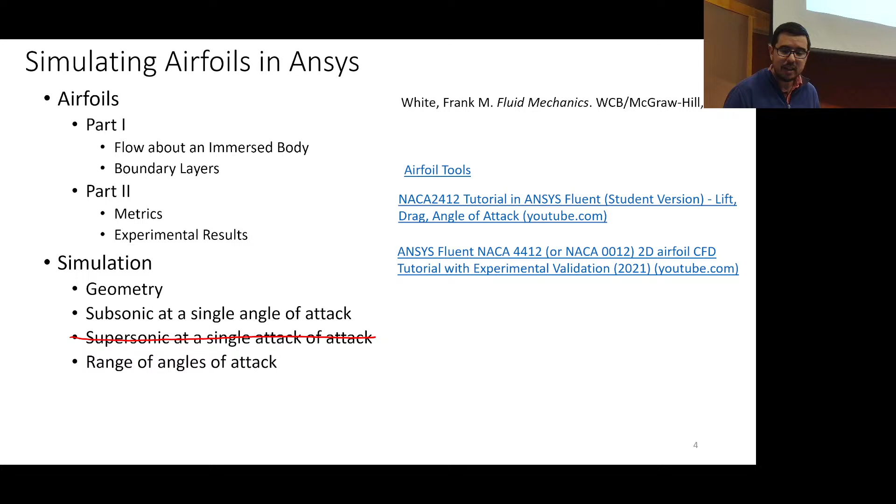We're really focusing on subsonic today, and we're not going to do supersonic. Okay, so that is not. Let me just. Yeah, we're not focusing on that, okay, but we will talk about a range of angles of attack.

So when we have an airfoil, we have flow about it, and what have you already simulated that has something with flow about it? We've simulated a wire, right? We've simulated cylinders, or spheres, better. Well, the wire was like a cylinder, but then we simulated spheres in the last homework, in the last session.

How are these types of simulations similar or dissimilar to each other? Like, what are the similarities? What are the differences?

If I'm thinking about an airfoil, you don't even have to think so much about the simulation, but just think in terms of the real world. How are these simulations, how are these physical experiments similar or different from each other?

Yes? Well, they're going to be different geometries, but you're going to be using the same. In the spherical one, you just use the axisymmetric condition. Yes. In something that you need a 3D object, you'll just extrude it. Okay. In the cylinder case, you just extruded it. Okay. Whereas in the sphere, you use the axisymmetric, but basically Ansys is going to do the same thing, like taking the surface integral and applying forces.

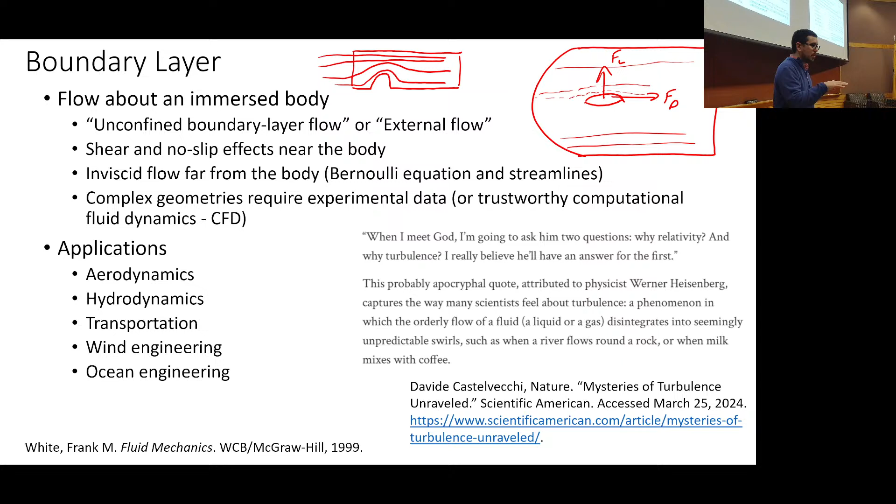Some of you want to do supersonic modeling for your final project. That's okay, except I suggest that you stick to very simple geometries like a wedge, because one, we're not going to cover supersonic flight in examples that we do, and two, they're much more complicated and you have shock waves and those effects.

Okay, so another interesting thing that happens with foils is separation. And this is not like you're separating from your family or anything like that. This is separation in the flow. You're taking some fluid mechanics now, right? I asked the other class, have you got to the boundary layer problems yet? No. Blasius? No. Boundary layer? Okay. So here's a little fluid mechanics for you.

This is a lot of fluid mechanics today, right? I put a flat plate, like you see here. A lot of times they put a little knife edge or something there, but it's just a flat plate. And I start running air over it. That plate can have some drag on it, right? Even though it might have a very small front cross-sectional area, it has length, and there can be shear along here that exhibits some drag.

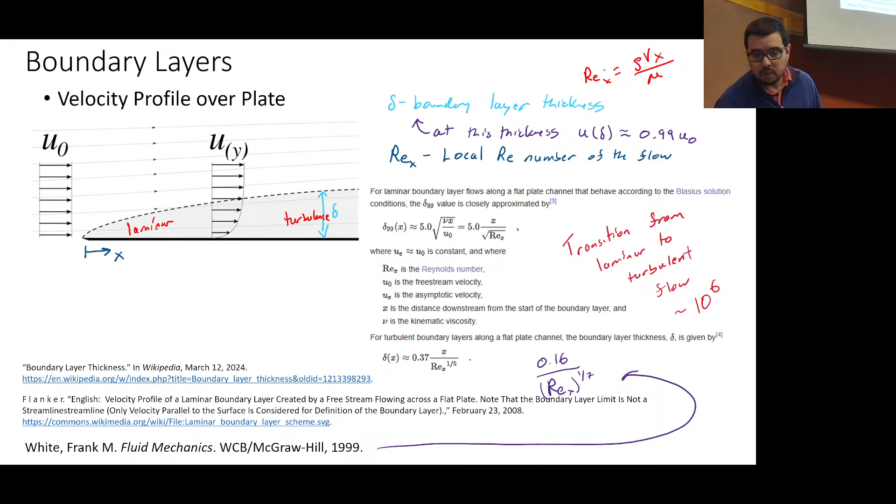Now, you can watch different YouTube videos or read different papers and the d'Alembert paradox about why things really fly. The rough approximation we're going to go by here is, what does everyone usually say? What is the one sentence version of why airfoils generate lift? Yes. Is it because there's a higher pressure below the foil than above it, so it pushes it up? Yes, and can you add a conjunction like because? Why is that? Because of the design of it? That's too vague. Go to the physics a little bit.

So you're right. Airfoils generate lift because there is high pressure below the airfoil and lower pressure above the airfoil. That's true. So let's make it one sentence. We could say the lift force due to high pressure below and low pressure above occurs because... come on, yes. The speed of the air is different on the top and the bottom. Yes, and low pressure is associated with... High velocity. Yes, yes. We're mechanical and aerospace engineers. Okay.

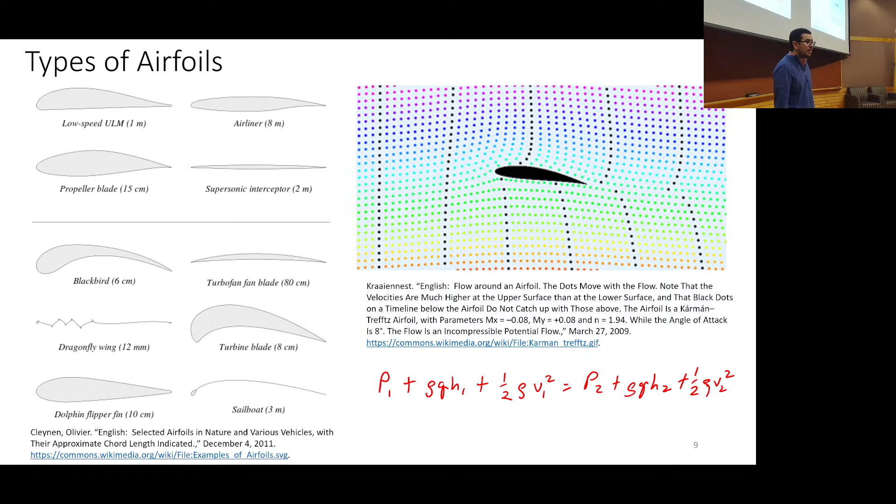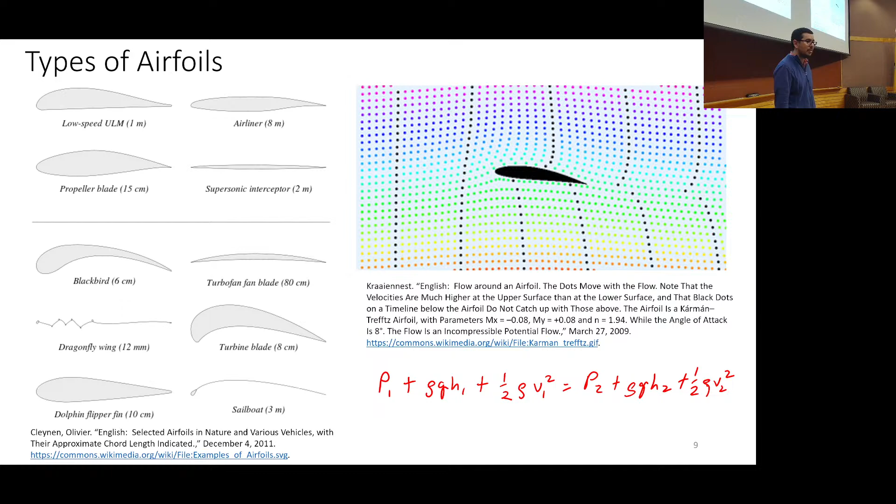Yes? One of my classmates says that it's because the air is going faster over the top of the foil than on the bottom. Is that what it is? The air is, in fact, going faster on top of the airfoil, which means there's low pressure on top of the airfoil. It's not the other way around. It is not the other way around, okay?

And so we have this beautiful little demonstration. And someone asked, how did they do this simulation? I'm not exactly sure what they did, but let's just follow the profile, okay? Dot, dot, dot, dot. And what happens? It disrupts the top flow. Right, and how is the flow above? If this were a car race, and these are all the little cars, who's winning? The air on the top is winning.

And sometimes they say, oh, it's because of that camber on top, the air has to travel a greater distance in the same amount of time. So therefore, the local velocity has to be higher than the velocity that's just below the airfoil. Okay?

So, yes, go ahead. Maybe I'm just being too picky, but is there not more friction on the top because... I don't know. Well, so yeah, there's a larger area, and yes, you could say so. This is the first order. When I say first order, this is like the kind of elementary reason, right? But fluid mechanicians, a lot of people say there are paradoxes. There are all kinds of things, like you just Google YouTube videos, look at Veritasium, they'll say this is why the foil really works, all right? It's really this, it's really, yeah, okay.

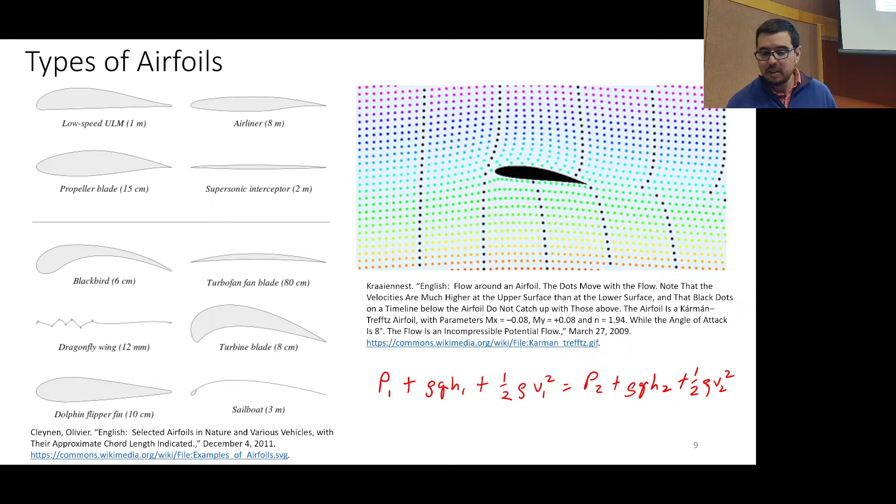Okay? So these are all things that you can play with, and people have played with in their designs and with their wind tunnels. Even the Wright brothers, they made a wind tunnel, and they were testing things out. So, let's talk about some of the metrics. And these are both geometric quantities and also the coefficient of lift, the drag, and the parameters that we measure when we're doing the experiments, the forces.

Okay. So again, I'm not going into like the 20% this, the 40% that, because we're going to be studying it in 2412. But the basic thing is that, as people said, we need a chord length, which is how long the airfoil is, and we need a span. That's how wide the airfoil is.

And in 2D, which is what we do our simulations for in this lab, we're only using 2 dimensions, we essentially just say that the span is 1 meter. And that's a pretty good assumption. A lot of the 2D, like you're like, how do I get this 3D number? I've got to get a force out of it. It gives me force, but in order to have a force, I've got to have a depth. So usually the simulation software says 1 meter is what you're going to use.

The area, this confuses me, and you're very smart, so you won't get confused too much. I often think, because my PhD was in spheres and in liquid bubbles, right? So I'm just like, I need the cross-sectional area, and that's kind of this frontal area that's hitting the liquid, and that's going to be my area that I'm caring about. Because I have this. Do I have it here? Yeah.

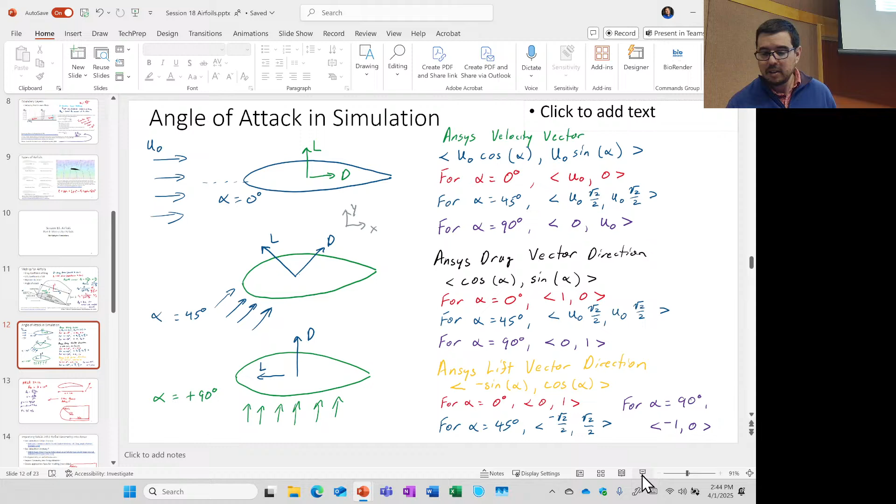Now, I gave away my answer. Okay, you didn't see that. Okay, and you didn't see that either. Okay, so

Alpha here, what is alpha? Some of you said it already. Angle of attack, right? So then that top one is angle of attack equals 0. What do we see? When we calculate lift and drag, the drag component is always parallel to the free stream velocity. Okay. And you can say, oh, that makes kind of sense. Well, why does it make sense?

Well, we vary the angle of attack, what does that mean? That means that on a plane, the plane can change its angle of attack, but we're still interested in what is the lift relative to the velocity of the plane, right? I mean, we are interested in the angle of attack as well. But the free stream velocity is going to be orthogonal to the lift and parallel to the drag, all right? Now, we're going to talk about the differences between manipulating angle of attack in simulation and experiment.

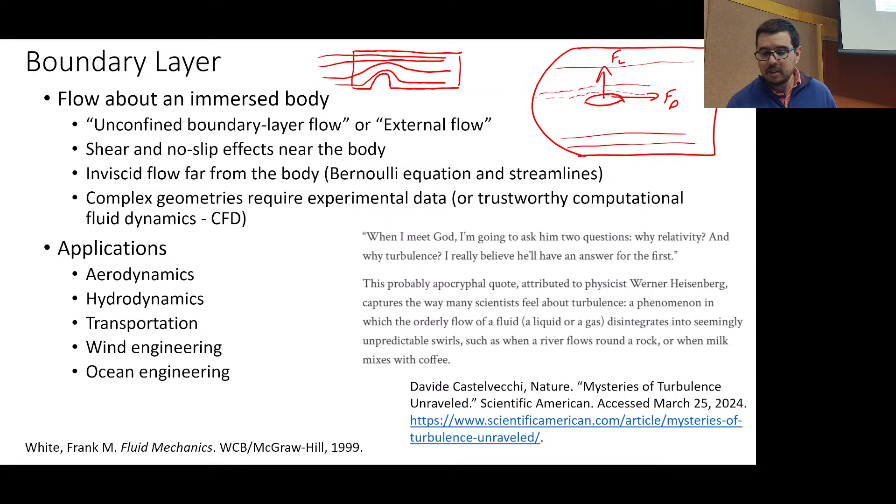And we are able to essentially, oops. Oh, okay, well, here you go. It essentially looks like this, and we can bring in a velocity, like say this way, where it's all the way like this. You can even prescribe velocity on these sides that are inlets, right? And they should be all the same vector length, and that's 0 angle of attack. Or you can get to angle of attack of like 10 degrees. I don't know if that's 10 or not. Okay, like this. That is not 10 degrees. Anyway, you get the point, you can bring in the velocity at different angles.

Now, how does Ansys calculate lift and drag load? It's calculating it like that. Ansys, and most softwares, are going to tell you what it is relative to the coordinate system, not relative to the airflow. Because lift and drag, as we discussed, that's when you look at what's happening with an airplane. You want to figure out what the component of lift is orthogonal, perpendicular to the flow coming in. So what do we have to do?

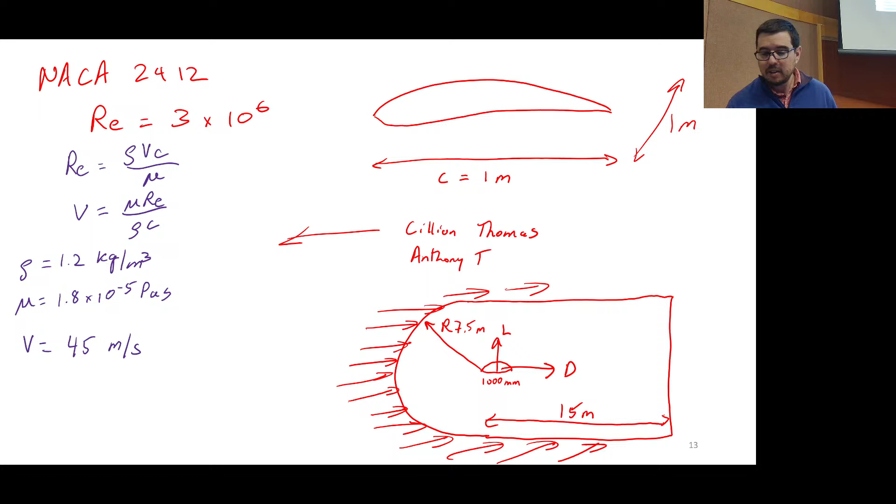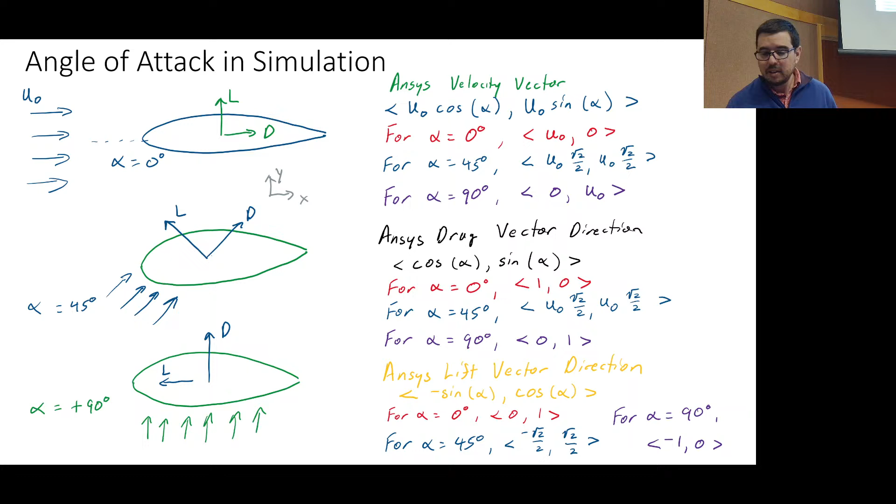No, you don't use Mohr's circle, you just use a free body diagram. And here it is. No, that's not it. There it is. So you see Fluent, we'll call L Fluent and D Fluent. They are linked to the coordinate system. And we're specifying the velocities. We're breaking the velocities into an x coordinate and a y coordinate based on the angle of attack, and we can do that with cosine and sine. That's really easy. So we'll bring in those velocity components as we change the angle of attack.

But we need to think about how to define the vectors that are going to be parallel or orthogonal to the direction of the flow. So if I want the true lift force, and Fluent is telling me it's this, what do I need to do? I need to construct sides of a triangle that when I add them to each other, I get this vertical component. And the same thing for the drag: I need to construct sides of this right triangle that will give me the drag component. So this is how you calculate the lift and the drag: the lift orthogonal to the flow, and the drag parallel to the flow. It's pretty simple, and you want to do this in MATLAB.

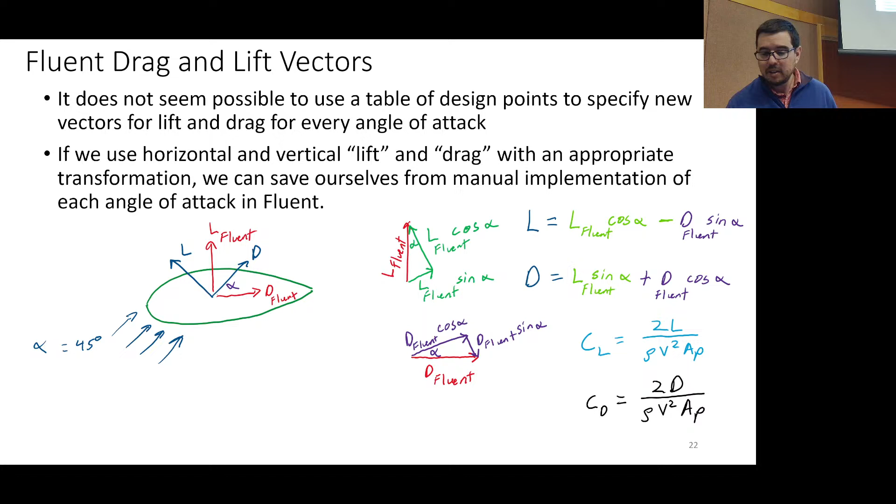So you'll do this in MATLAB. You can look at the video to see how to run that code. Okay. Now, when we talk about convergence, there are a couple ways to do it. In this lab, you're not going to look at convergence as you change the mesh and stuff. It's too complicated. Okay, well, or I don't know. It's not. We're not doing it that way.

Here, what we're going to use for convergence is the ground truth. And where do we find the ground truth? From experiments. Where do we find these experimental results? In the nice little wind tunnel. We're not taking you to a wind tunnel. We do have wind tunnels in measurement in senior labs. You'll use a wind tunnel. Okay. But what instead we can do is we can look at the literature.

Okay. And so an example of looking at the literature is here. This is a paper from 1977. And it's beautiful in its simplicity. They could do all these calculations without computers, as manifest by the beautiful plot that we're seeing here. So this direction is lift, and this here is degrees of angle of attack.

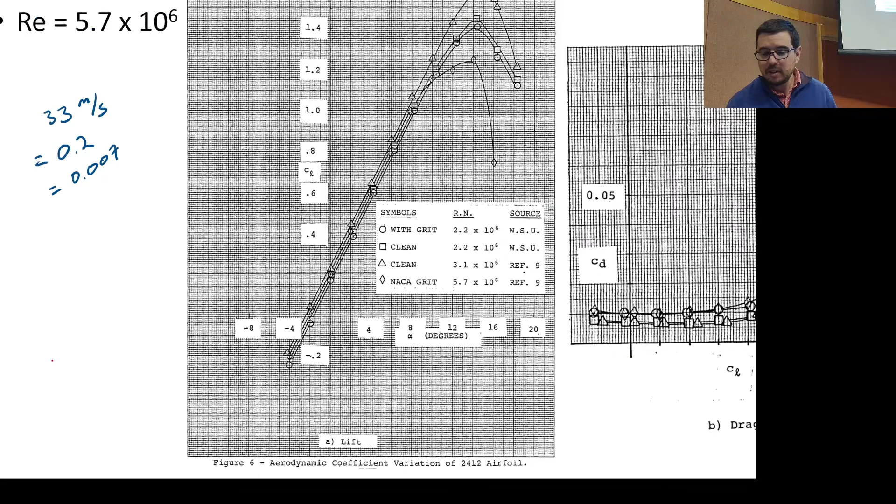And we are going to be looking at simulations with a Reynolds number of about 2.2 million and clean. Ooh, clean. All right, that doesn't like that much. Okay, the clean one. They have some experiments from another paper, I guess at 3 million, and that's pretty good.

I mean, if you do something in one lab and then another lab does it, or you do it on another day, and you're the same order of magnitude in your Reynolds number, and the curves follow each other like this, you're happy. You publish it, right? And that's what they did. And then they were also looking at having grit involved. So like putting sandpaper surface on it.

So what we can see here, the clean are the squares. So where are the squares? The squares are kind of in the middle. There's a square there, there's a square there, and you can kind of see, okay, for this Reynolds number, I can see at 4 degrees, and actually all of them are remarkably similar, I had a coefficient of lift of 0.6. Why do you think they care about like 0.6, 0.55, 0.54, 0.5? Why do you think they care so much?

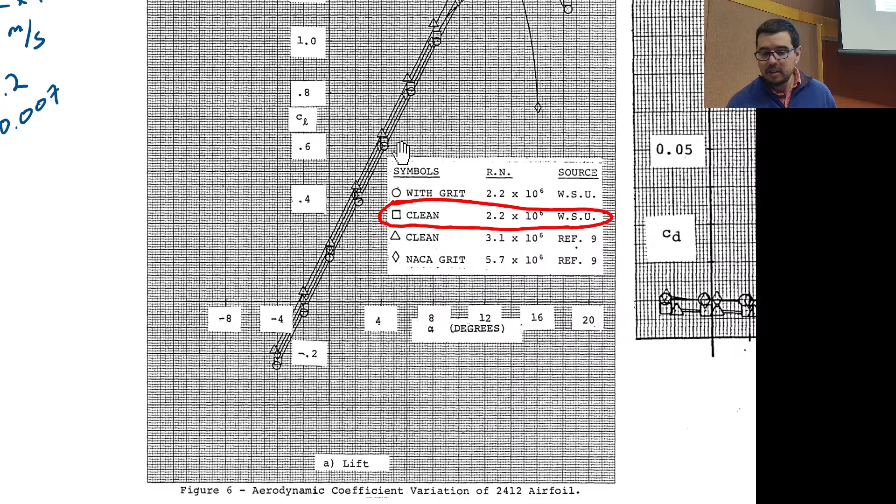You can use it on an airplane that's like, I don't know, 100 feet long, and that makes it. Sure, that's one. What if you care about fuel efficiency? If I'm telling you that I can increase my lift to drag ratio by 5%, that's a big deal, right? And some of the things that they're trying to do now with different prop designs or different things on the thrust end, they're trying to increase their fuel efficiency quite a bit.

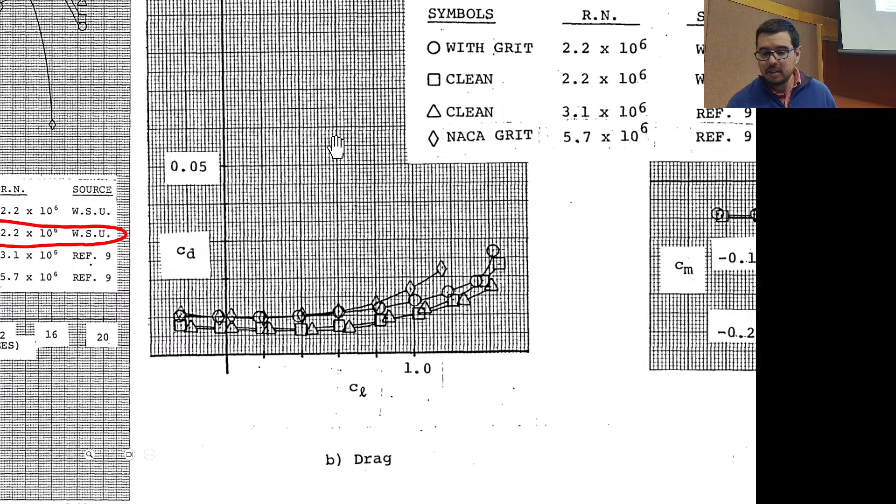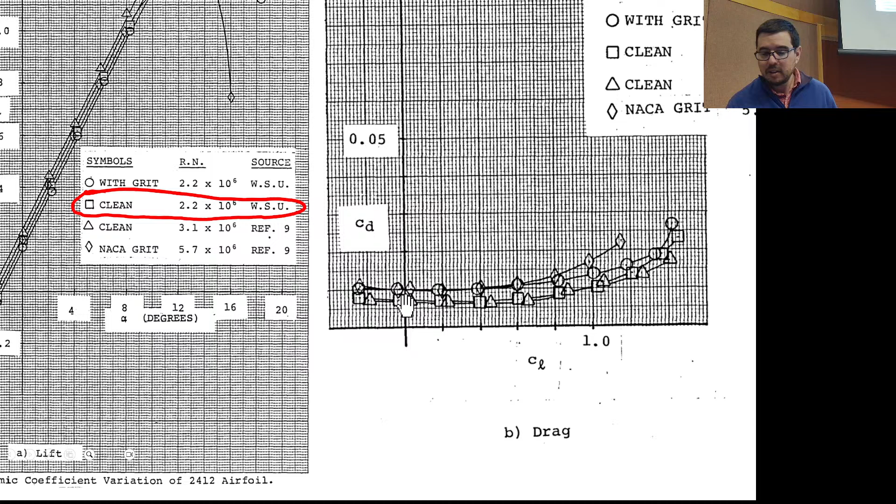Okay, so this plot over here is now a CD versus CL. So if you're running your angles of attack at 2.2 million Reynolds number, you're going to be looking at what's your CL first, and then you can come over here and see what your CD would be. So if my CL was, this is 2, 4, 6, 8, 1, right? So let's say we're at 0.4, then my coefficient of drag is, this is 0.01, 0.02, 0.03, 0.04. It's like 0.007. Something like that, at 0.4. See that? Because this is 0.01, so it's going to be like 0.00 something, less than that.

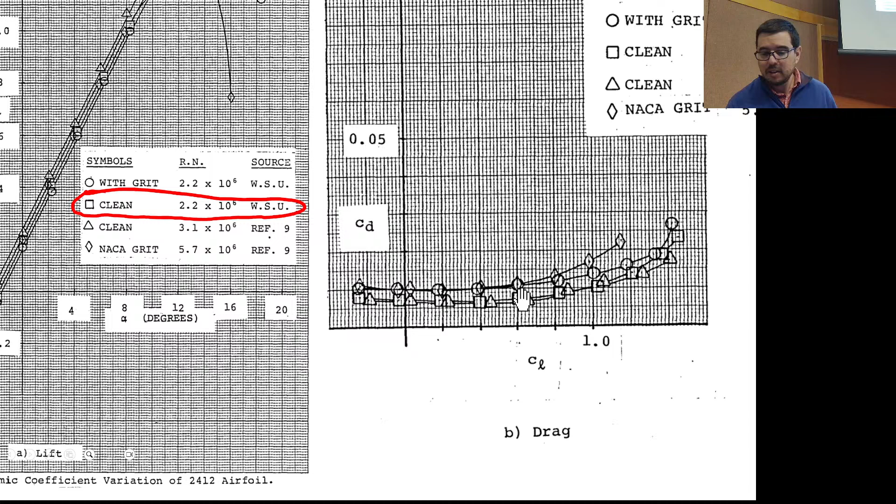And so when I ran my simulations, and Anthony T and Cillian Thomas also ran their simulations, I ran using their methodology, and then I used a way to calculate lift and drag. You can see that the agreement was amazing. I was like, whoa, this is incredible. Okay, now the coefficient of drag is off. It's like 30% off, but I'll take that. And so this is kind of what your lab is going to be about.

Any questions? So it's pretty involved. You'll see you spend a lot of time on the pre-processing, and then you probably have to think a little bit about the post-processing. But I think the meshing, getting the geometry, is actually remarkably painful, unfortunately. And while you're slugging away at it, you can just think, all right, I'm building skills for the future. It's pretty tricky to get this to work. Any questions about what we discussed?